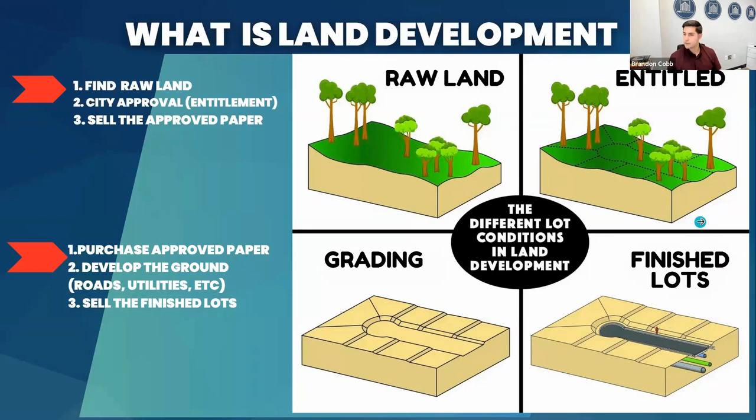So there's two options: one, sell the paper, and two, actually sell finished lots to national home builders. There's pros and cons to both, and this is a lot faster of a process, right? So construction drawings are finished, and then you sell that to a national home builder or a developer that wants to develop. And then this is a lot longer of a process because you have to actually do the development, right? And the process definitely depends on what state and county and municipality you're in. It can be shorter or longer. If you're in California, I'm sorry, it's a long process, or New York, New Jersey, etc.

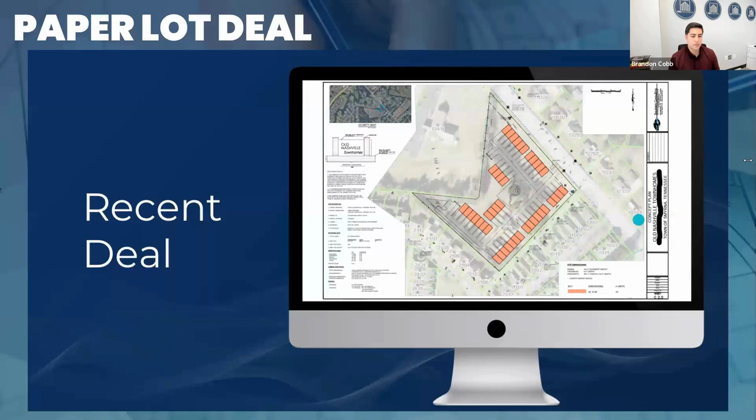So we talked about a paper lot deal. It was one of the first entitlement process paper lot deals. This is one that we just did in Smyrna, Tennessee. And there you go, we made $446,000. It was a pretty easy deal. It would have been easier if the person that brought it to us actually followed through.

There were some missteps, but I think it was a really good learning lesson for that person. It probably would have taken 6 months, but it took 12 months. And you know, it probably took about 20 hours of work, honestly. So it's a pretty good return on investment there.

And then this is another project where we took that paper, but we actually got it funded and put in the actual lots. As you can tell, this is a townhome development. There were 36 homes there. There's about 34 single family lots here. This is actually called Sadoff Cobb Way in White Bluff, Tennessee.

And this is called Lala Loop. So Sadoff is my last name, Cobb is Brandon's last name, and Lala is my mom's name. So that's something cool that you can do when you develop properties. Even if you're entitled in paper, you can name it and honor people that mean something to you, and just leave a legacy behind. That's one of my favorite things to do.

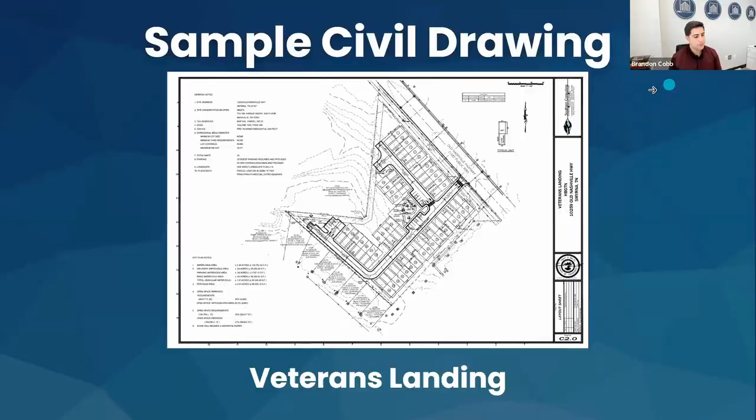So how do we start? Right now you have a piece of property, you got it under contract, and you're like, where do I start? You start by really talking to the staff, the stakeholders. You want to be able to talk to the planning commission, the city council, the planning staff. What do they want in the area? Let's say they want single family homes. So you have to make sure that you design a concept plan.

A concept plan is literally just a basic drawing of what it is that you're going to actually put, right? It's not exact, but it's trying to dial in the correct lot dimensions, widths, etc. to put those onto paper so you can understand the density that you're going to be able to get. Okay. So this is an actual concept plan.

So we would take this concept plan that will be done by a civil engineer, and we'll put all of the roads, etc. that is in accordance with that local municipality. Specifically in this municipality, they have what's called the Hartman overlay, right? If this was regular, let's just say another Dickson County, I probably could fit maybe 70 homes on there, but their requirement is a rear load townhome, right? So now you have alleys that you have to put in as well. There's a specific front setback requirement.

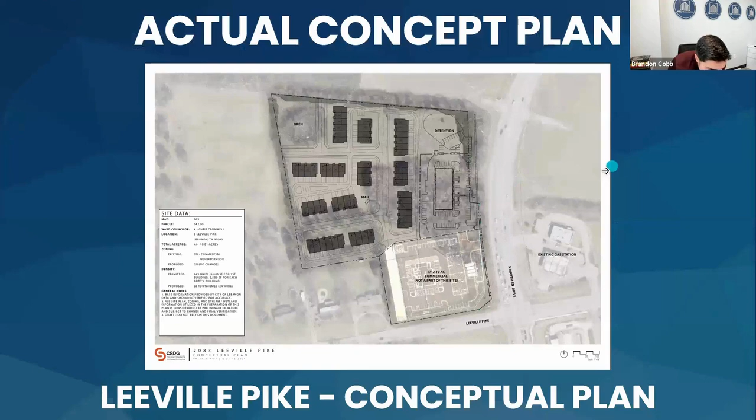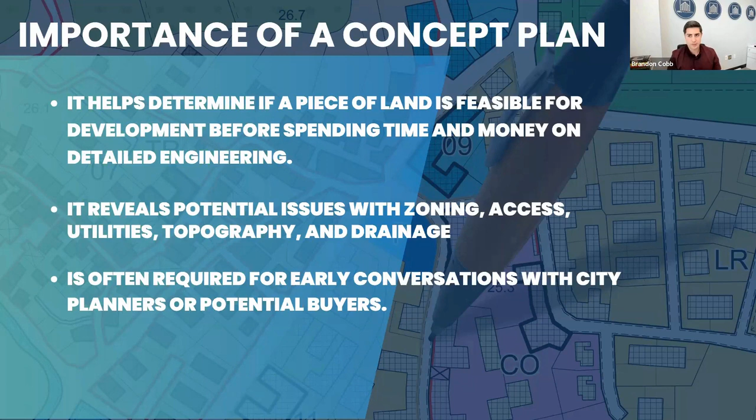And you'd also be taking into account, so this is rather flat, I don't know if you could see this, but these are the lines there. So the state has what's called LIDAR, which is the contours of the earth, right? And how it actually lays, to make sure that you're not putting a box onto a side of a cliff, because you probably couldn't do that. So it takes that into account as well. On this site, we knew that it was pretty flat, so the contours were not really that important.

So what do we do? How do we hire an engineer to do this? For our firm, we focus on hiring a civil engineer that is recommended by the municipality that I'm trying to submit to. So whoever they like working with, that's probably going to be the civil engineer that I'm going to hire. So when I talk to them, I ask them who they recommend. They'll give me a couple firms, and I'll reach out to those firms and I'll ask for a concept plan.

The reason I do that is because they have a working relationship with that municipality, and that planning staff and engineering staff knows best who is a good engineer and who is bad and who they have a good working relationship with. Okay. Again, a good civil engineering firm is going to have a good land planner, and that is somebody that knows exactly how to lay out a site. They want to have an actual civil engineer that can sign off on the actual construction drawings that we're going to go into if this concept is approved and the preliminary plat is approved.

And the reason for that is because they got that civil engineer in there to see if their land planning, that concept plan, is actually going to be able to get built in reality, right? So it's a good check and balance to see if that land planner is in line.

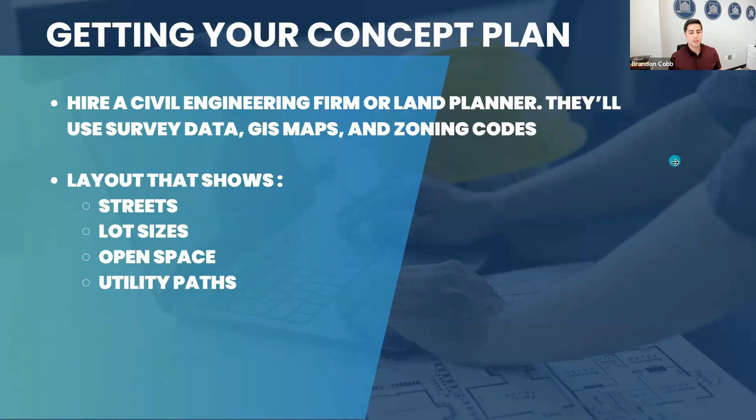So what we've got to do. When we're creating the concept plan, we want to make sure: what is the zoning? What can we put on here? Sometimes folks are like, oh, I'm going to put an apartment here, or I'm going to put townhomes here. There may be a moratorium on townhomes, or maybe a moratorium on apartments.

Even if the zoning says potentially that you can do this, there also may be an unwritten moratorium where, yeah, you can put townhomes here, but no one on the planning commission is going to vote for townhomes because they don't want townhomes anymore. They have enough. They want single family homes.

So a good civil engineering firm is going to be able to tell you those unspoken things that the planning commission and/or the city council and the planning department has. Okay.

Brandon, any questions? Anybody got any questions so far? No, you're good, man. There's a couple questions in the chat, but we'll save them to the very end.

Cool. All right. So how do you know if you need to rezone? You've got this concept plan, let's just say it's a commercial lot, it's got road frontage, and you want to check what the current zoning is. The current zoning is going to be on the GIS map. You can call the planning staff and ask them what their current zoning is. Like I said, it may say that it'll support townhomes or single family.

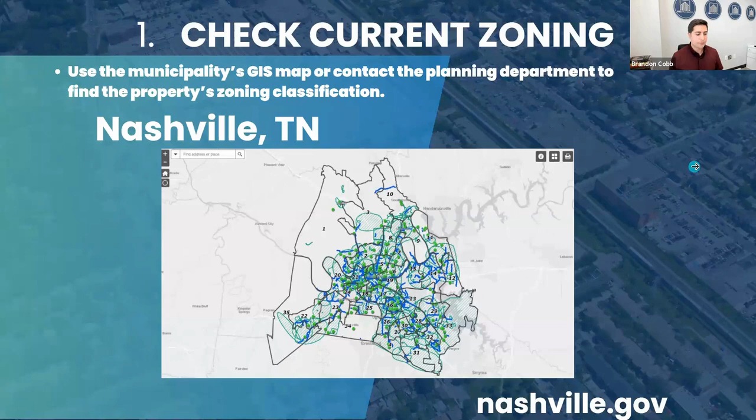So if we're in Nashville, we'll go to nashville.gov. There's the parcel viewer. We'll go into a site and try to figure out what the zoning classification for my site is. So I'll go to the parcel viewer. It'll tell me, let's say, R6. It'll say this is zoned R6.

I will then take that R6, go to the zoning classifications, and I didn't pull that up here, but you can go to the zoning ordinance, figure out what the R6 is, and it'll say 6,000 square foot lots. And let's say you have 60,000 square feet of lot, and you can be like, oh man, I now could put 10 homes here, possibly, right? So now this is where you start your math.

And what you do is you'll go ahead and compare your site and what it is that you want to do. Let's say you want to put townhomes. Are there townhomes or single family homes in and around here? If the zoning allows, you can go ahead and put that in there.

And sometimes you have a commercial site and you're like, oh, I want to put townhomes here. If there's no residential future plan for this area in the city's future plan, or when you talk to the city, they may not let you spot rezone that area, but they may. So again, take that municipality, the agency review, and the planning staff will tell you what they want and don't want. Take that, and based on their guidance, you'll create your concept plan.

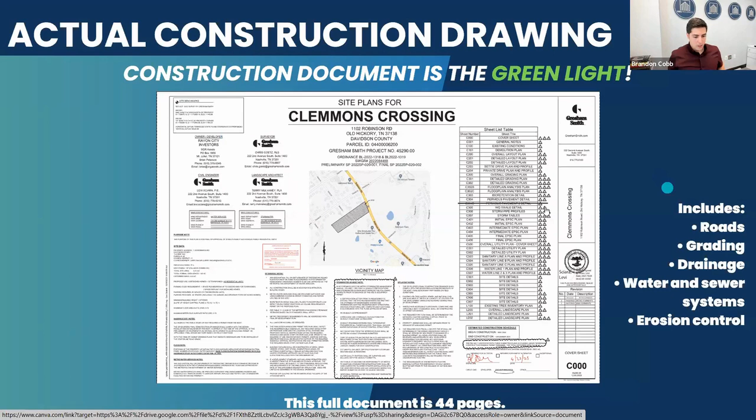So here we go. Get this. Hold on, see this. All right, can everybody see my screen? Yeah. Can you see the screen? Okay, great.

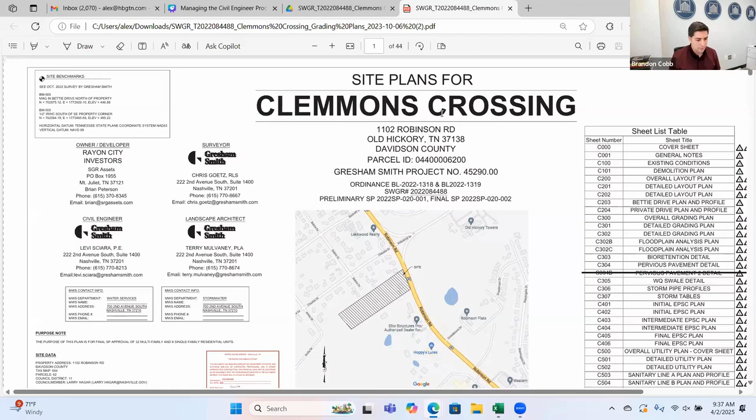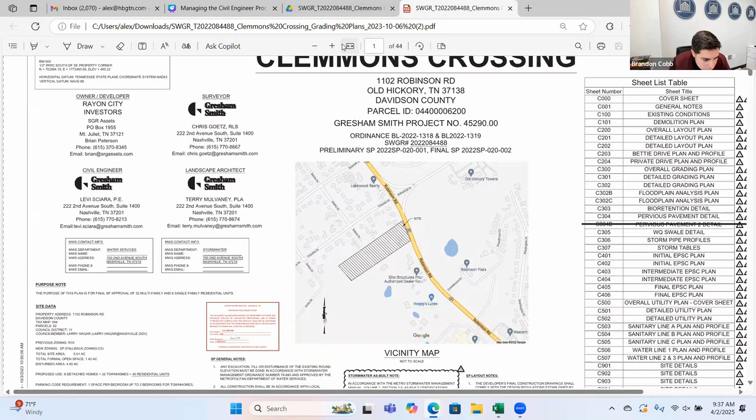All right. So this is a subdivision that we are doing. The first page of a civil engineering plan has your title block, right? What is this called? So Clemmons Crossing is the subdivision. The address and the parcel of the actual property. Based on the municipality, it'll have the engineer here in the center, and it'll have the actual engineer who's designing it. One second, let me go here. To the right as well. Sometimes it's at the top, sometimes it's the bottom, but it's typically here in the margins.

In Nashville, it'll also have your stormwater permit number and your preliminary SP approval. See that?

So, and your final SP approval. So this thing is an approved preliminary, approved final, and now stormwater approved the grading on this thing as well. Okay. On this, up top you have what's called a benchmark. Sometimes there's one, sometimes there's two.

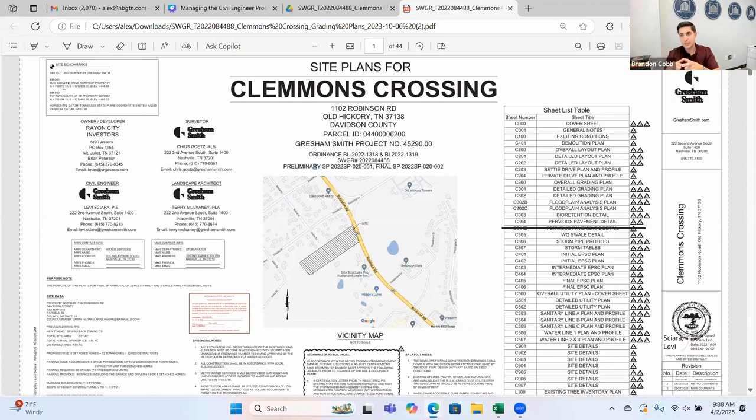And a benchmark is a confirmed point of reference that is verified by GPS that says this is our 10-digit grid, right? And it says that this is this point. Sometimes it's, let's say, a top of a fire hydrant, right? And it's going to say the top of this is at 446.88 elevation above sea, and at this coordinate, north and south. So you have a GPS coordinate for it.

The reason it's important when we're doing civil engineering plans, everything here talks about elevation and benchmark, and all that is, if you could just imagine your latitude, longitude, right? Your left to right, and the elevation is the depth at which you're going to be able to design your road, your sewer, etc.

These benchmarks that are set onto a site have a little GPS puck that we put on there, and it talks to all of the little tractors and all of the equipment to ensure that we're digging as deep as per the civil engineer's design plans, and we are at that depth. It's just a confirmation to make sure that we are calibrated on this site. It's our calibration point to the site. AKA benchmarks. Very important.

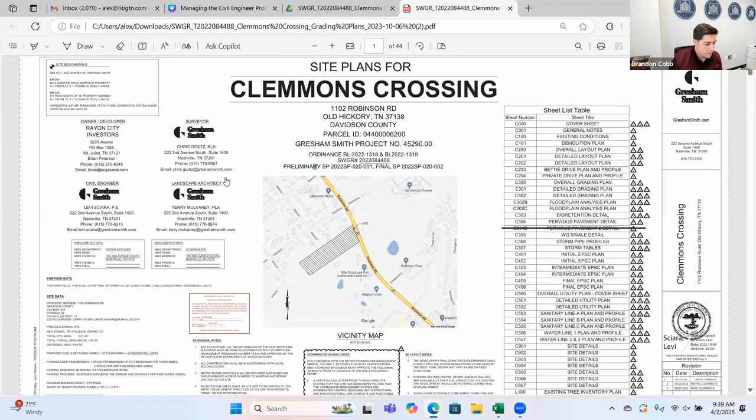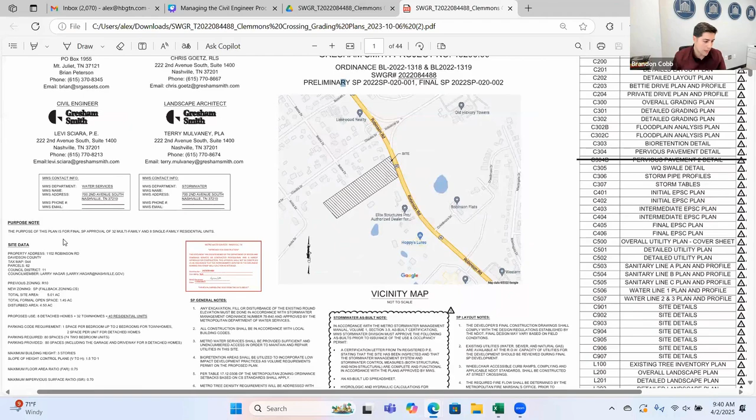All right. So it talks about the developer. It'll give you who owns the property. And then you have what's called general notes and specific site data and special notes. That is all here. It talks about what kind of property this is. In every single municipality, the cover sheet sometimes is super detailed, and sometimes it doesn't have much. It's just based on the municipality. In Nashville, it's very specific because every single reviewing body wants their specific notes. So the SP department, which is like the planning staff, wants you to have all these notes on here.

It talks about the landscaping needs to be irrigated. Just this one point, why is that important? Because let's say you have 36 homes and 36 water meters. Well, it says everything needs to be irrigated. That means if you have any grass outside of the actual lot, which you would, because you have some common space, it needs to be irrigated, which means you now have a secondary water meter that you need to account for in your construction budget, because now it's another tap and it's now a bill to the HOA.

So you want to make sure that you read and understand all of the notes and all the requirements on your special notes and specified notes of every single sheet. Okay. Your stormwater, for instance, and I won't bore you to death because it'll be a lot to cover, but you have to do what's called an as-built drawing. So when we create our stormwater structures, the little drain that rain goes into, we have the civil engineer plan, the blueprints that say, go ahead and put this in. Then what we have to do is do an as-built.

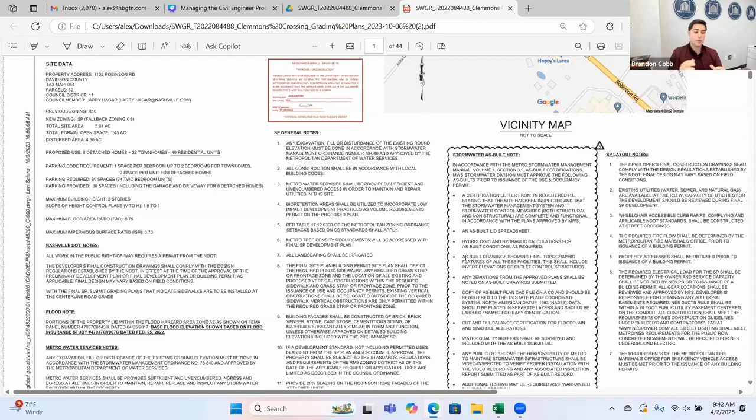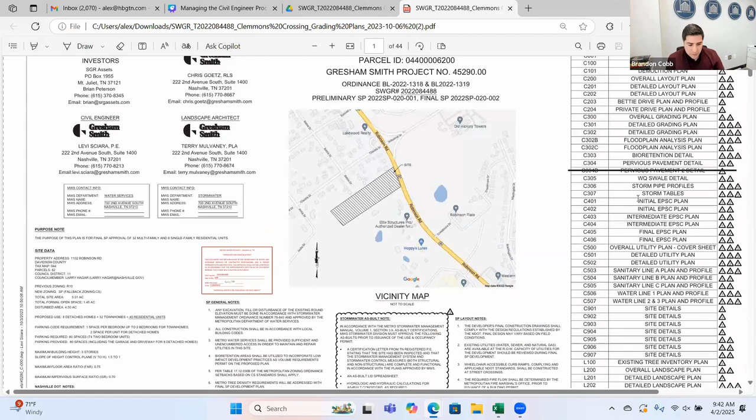So you'll do an as-built, and the stormwater department wants you to present that to them for them to give you an approval. So a whole bunch of notes, very important. Typically you have a signature here telling you that your stuff is approved and some signatures at the bottom. This is what's called your sheet list table. It will have all of the sheet numbers and all the plans per sheet. In Nashville, you have all these other notes, your erosion prevention, your grading and drainage notes, etc.

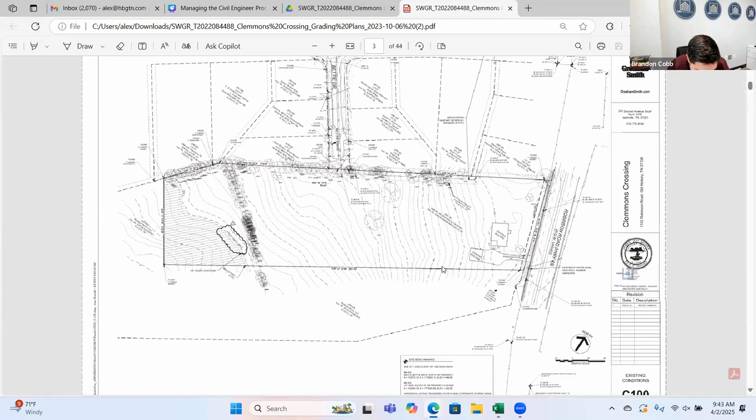Okay, demolition. So in here, this is what's called your existing conditions. When this thing got surveyed, this is the existing conditions. You have a house here, you've got some bushes. This is the current topography. So that's what this sheet calls for. Then you have what's called your demolition. What are we actually going to do to this site?

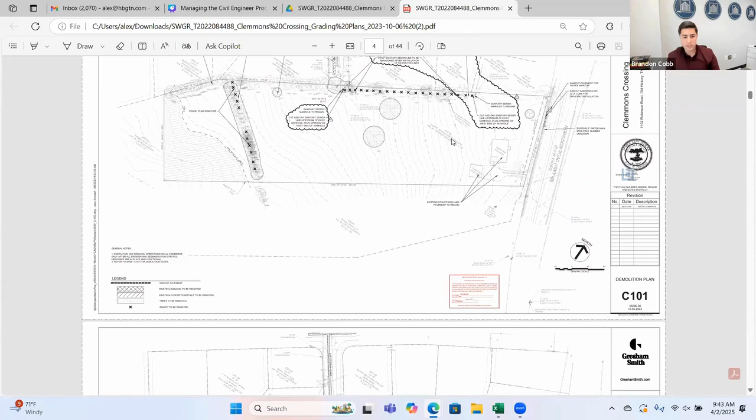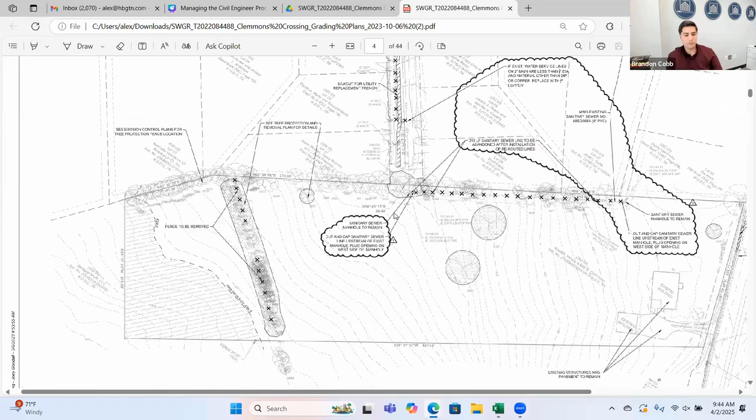On this site specifically, there's a house, and we're going to actually keep that house. We're not going to demo it. Everywhere else, this says cut and cap sanitary sewer upstream of existing manhole, plug the opening on the west side of the manhole. So it's telling us exactly what we have to actually do. And then here we're going to have to protect the tree from silt, so we'll put little noodles around it. So it tells us exactly what to do for our demolition or clearing of the site.

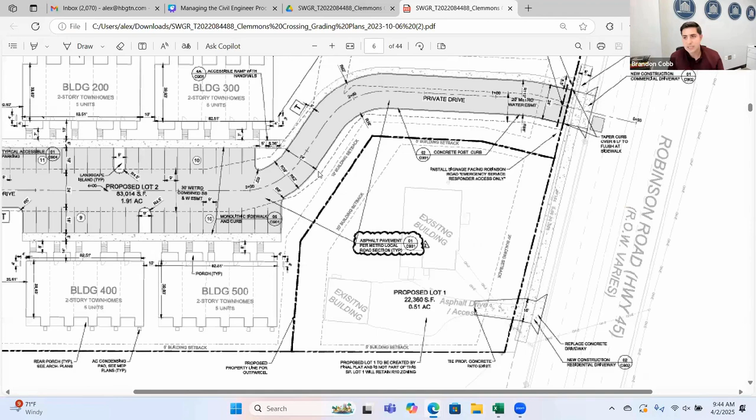Okay. The next one is going to be your overall layout. So this is just overall, this is what the site's going to look like. And then you're going to get into your detailed layout plan, and your detailed layout plan is going to actually start talking about distances and the radiuses that are going to be on the drawing. Okay.

Also, one of the things I wanted to mention is, over here to the right, you always have a revision. So let's say we got on site and we need the engineer to revise it. This is very important because it has a revision date of like Metro Water, stormwater. They wanted a specific thing. We're confirming that this sheet now is in line with that comment of MWS. So we're on the right revision of our plan. Okay.

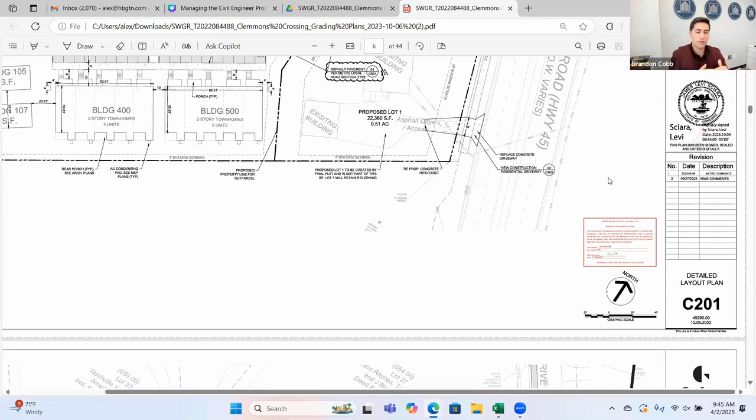So this is the detailed layout plan. And as you can tell here, there was a couple, right? So your detailed layout plan is going to be sometimes 2, 3, 4 pages. So let's just talk about it. Okay.

So here you talk about, okay, how do I get my costs, my takeoffs, right? How much is this going to cost me? So there are companies that'll do what's called a takeoff. They'll figure out all the materials. Your civil engineer will give you an estimate of construction, and a civil contractor will look at all these plans. And the more details there are, the more apples to apples you're going to get of an actual bid. So it's very important that you have very good detailed plans.

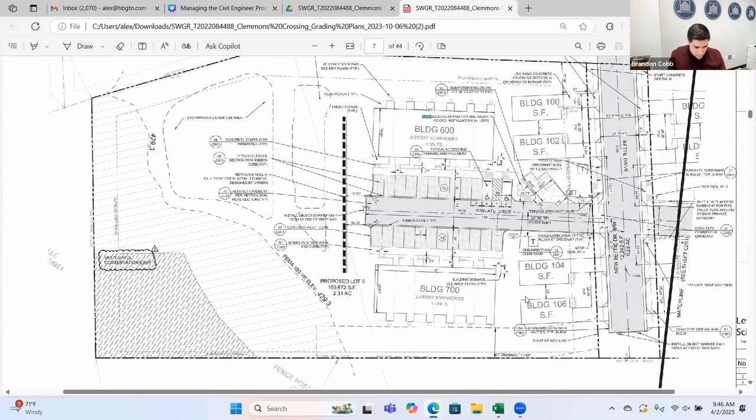For instance, this says a 5-foot by 3.5-foot concrete pad for a mail kiosk, right? So now you have to think, okay, I have to get a mail kiosk. Not only does it have to have a concrete pad, but now I have to buy the actual kiosk. So this is going to allow you to really figure out how much this whole thing is going to cost you. And then we'll talk here in a second about some value engineering of what you can do. All right, here we go.

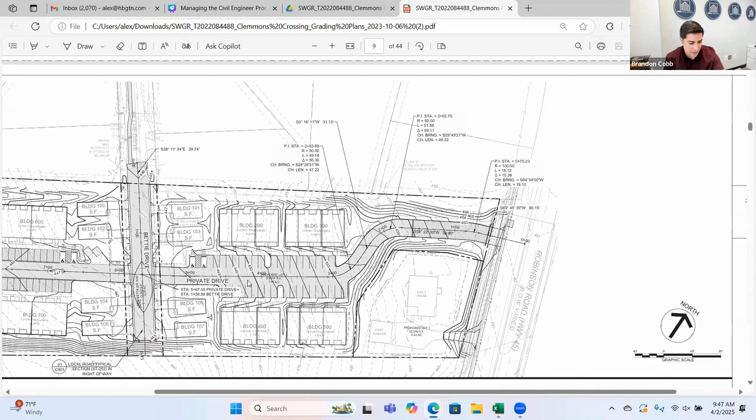So now you're talking about your grading plan. Your lines that are lightly dashed are your current and existing grading, and the ones that are solid are what elevation we're actually going to grade to. So here, for instance, in this line, we are at 465 elevation, but this little dot here says 465, and here's 459. So that is 6 feet of cut. That means we have to cut out in that section 6 feet to make sure we are in line with what the civil engineer is saying. So that's what all these marks are. The civil engineer is telling us how they want us to grade this site.

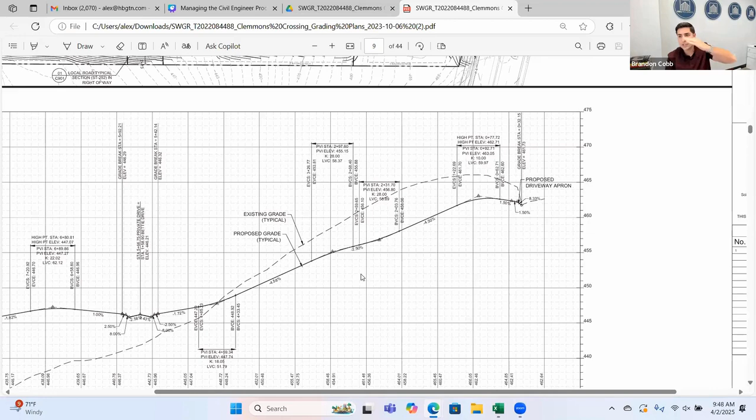Okay. And then this is what's called the cross section, and it's telling us that this is our current existing grade, but this is our proposed grade. So in this instance here, we are cutting, but in this instance here, we're actually filling. I don't know if you can see that, right? And it'll tell you at what degree, what elevation and at what slope you're actually cutting and or filling your site.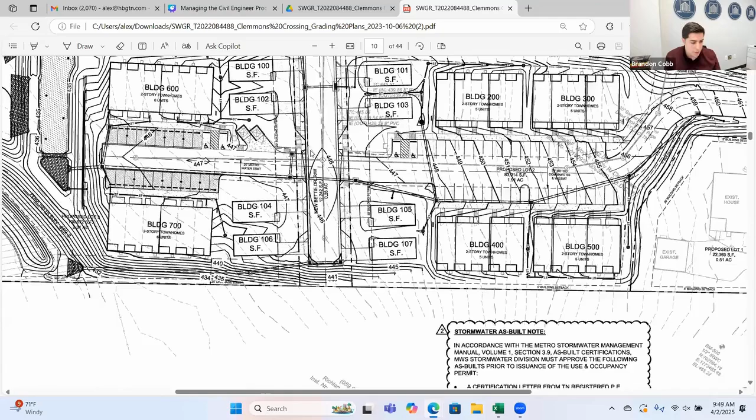I will fast forward to... Those are like the ditches that the water drains into on the side of the curbs? Correct. All right. So here we are, we're at the grading plan. This is what I wanted to kind of talk to you about.

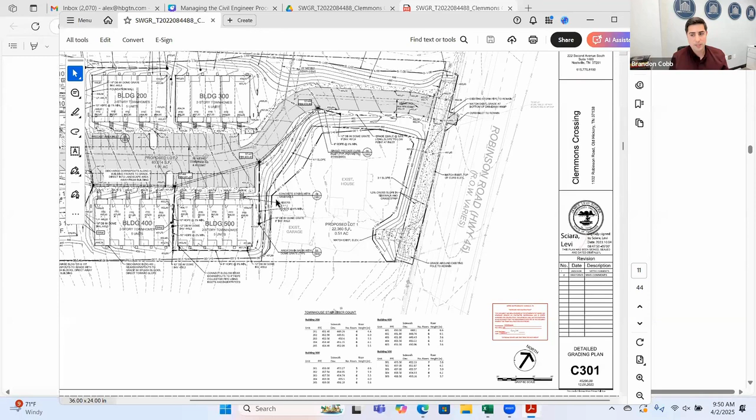So this is where, on this specific site, because it's an SP, you're telling the city exactly what kind of homes you're going to build. And in Nashville, they want to know the elevation of what's called the finished floor elevation, FFE, of every single unit. Okay. So when you go here, it says your elevation is 455.5. That means 455.5 feet above sea level. And then this is 457 feet. That means when I grade, that second home is going to be 2 feet higher than the first one. So it's going to be kind of stair stepping up.

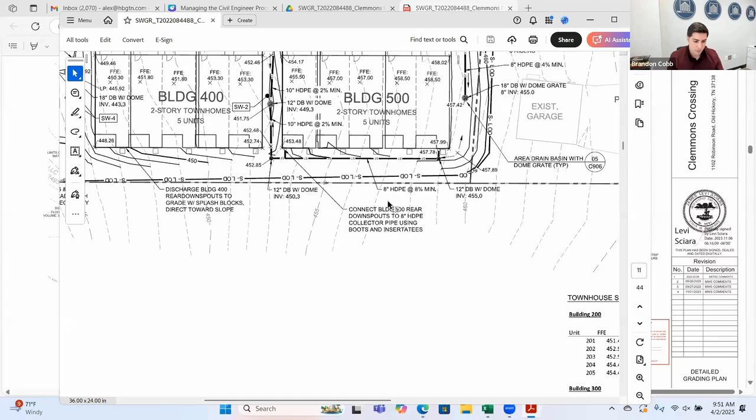This is important to quite a few people. One, it's important to your grader because it needs to grade accordingly. Second, it's important to your foundation people. Thirdly, it's important to your framing people because this structure is going to be one structure and they need to make sure that they follow this, right? So if you're actually constructing this, you need to make sure that's done properly. And then it also tells you all your discharge points for all of your stormwater.

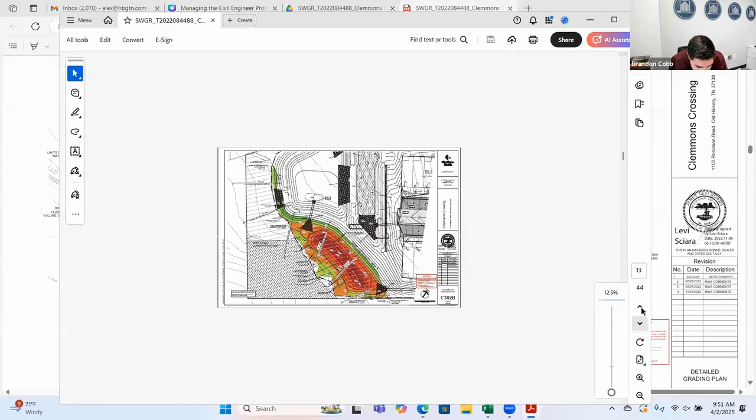So then let's see. So this is your floodplain analysis. This says that this is in a floodplain. What do you need to stay out of? The places you need to stay out of, etc. This is pretty extensive. Hold on.

All right. So here you have your cut and fill. Your person that's going to be grading your site is going to go off of these volumes on how much stuff they're going to cut. It means how much dirt they're going to take away and how much dirt they're going to have to put in and how they're going to balance the site. It's very important because that's how much they're charging you, because typically they charge you per yard of material moved or brought in.

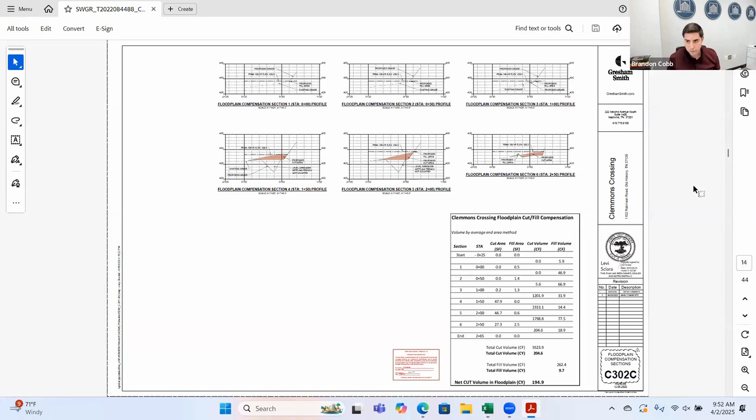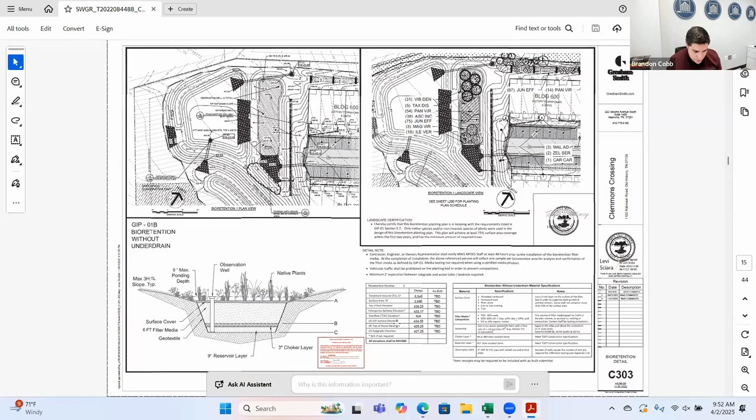What I want to show you is also, in some of the sheets, you'll have details. And at the end of the sheets, which we'll go over briefly, you'll actually have exactly the cross section of how the city wants you to build this pond. There are many ways to build it. This is theirs, and they want to make sure that you build it in accordance with their specifications. So they'll have the cross sections and details. So these are all details of every single stormwater structure, etc.

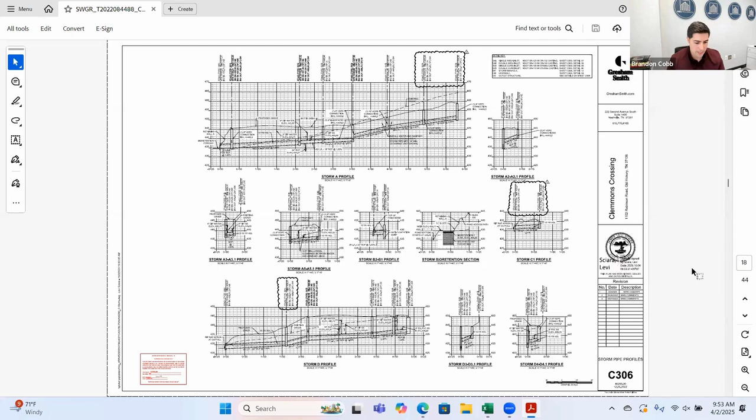Then we're going to the actual structures. So it talks about every structure that you make. Those concrete structures that are in the ground are actually made for each project. The reason for that is because you have your inverts, right? The pipe that comes into the structure and the pipe that comes out of the structure to keep water flowing. That little thing is made specifically for the site. That's what this detail is, because it wants to show your storm structure Charlie 1 is this size and this depth and this width.

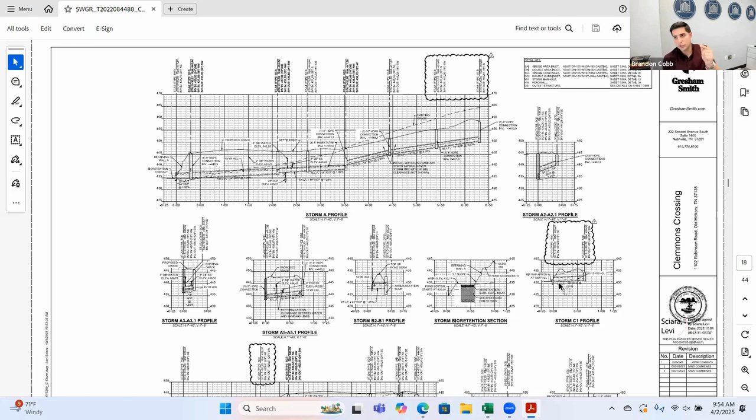So then we send that over, when we send the CDs, to a company that makes structures, and they price that out specifically for this project. And it'll come onto the project when we order it, kind of like a Lego piece: Charlie 1, Charlie 2, Charlie 3, in accordance with your plan. And so here we are. This is a great example. You'll have all your structures, and you'll have exactly the inverts that we're talking about, pipe in and pipe out, and at what elevation, to make sure that those holes are made in those structures correctly.

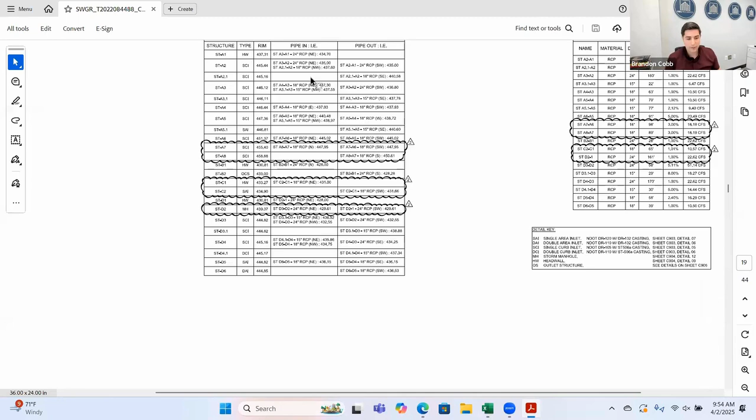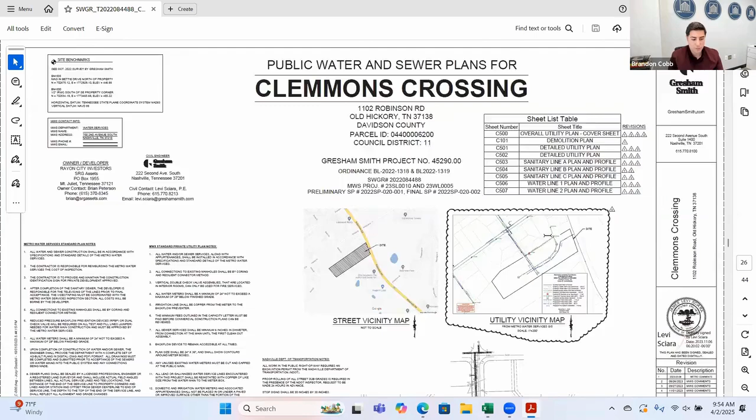And then you'll go through it. This is your stormwater, and then where they're supposed to be laid out, etc. In the same way, you'll have your public water and sewer, because we need to know not only the size of your water and sewer line, and we're running a little bit out of time, but you also want to know the depth of that sewer manhole.

So here we have, to our left, 445 feet, and the bottom of this thing is about 439. So this manhole that's in the ground at that specific elevation and latitude, longitude, is about 6 feet deep. But what's more important is that the invert for that manhole says that it's 439.58.

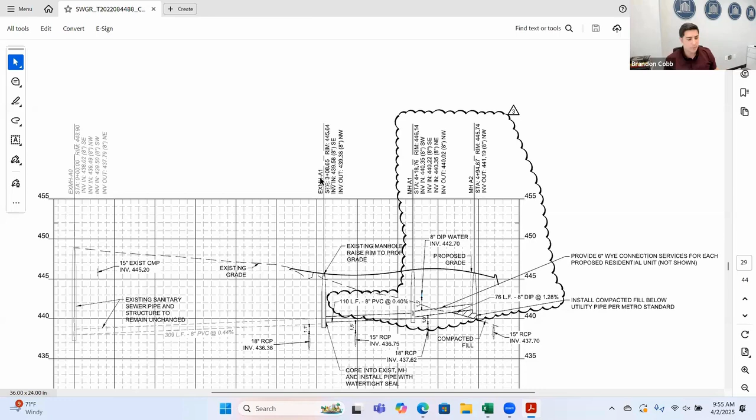It's an 8-inch hole, and it's facing southeast at this specific station, which means this specific azimuth, right? And all that is what angle is that pipe in that actual concrete structure. Okay. So all of this is important because you want to make sure that you're looking for us.

And before I finish, one of the things that you do when you're doing the development is you're doing geotechnical, right? Geotechnical is the investigation of the subsurface, right? How much rock, etc., is on this plan. So while we're going through the planning process and getting approved, we're doing a geotechnical survey. The reason we do that is because we want to know where the rock is. So then the way that we lay out this site may be a little different.

If we have a whole bunch of rock on one side, and we don't have any rock on this side, it may be beneficial for us to do maybe one less unit, or maybe it'll be beneficial for us to shift some units to get the sewer out of the rock.

Another thing that we do at our firm is we try to ask the local municipality. Some of them are favorable to this and some are not. So we say, hey, can we put the sewer in the front setback? So here, as you can tell, you have your sewer in the middle of the road. Well, sometimes we'll ask them, can we put it here in the grass? The reason that's important is because when I have to backfill, remember that sewer was 6 feet deep.

When I have to backfill, I've got to backfill it with rock because there's going to be cars driving on it. When I backfill it on grass, I only have to have 6 inches of cover, so 6 inches of gravel on top of that pipe, and then fill it back up with the dirt. Well, guess what? Now that means I have less dirt that I have to take off site, because when I dig this hole, I can put the dirt back in, and I have less rock and material that I have to bring onto site, and rock is very expensive. So it's just a cost saving measure.

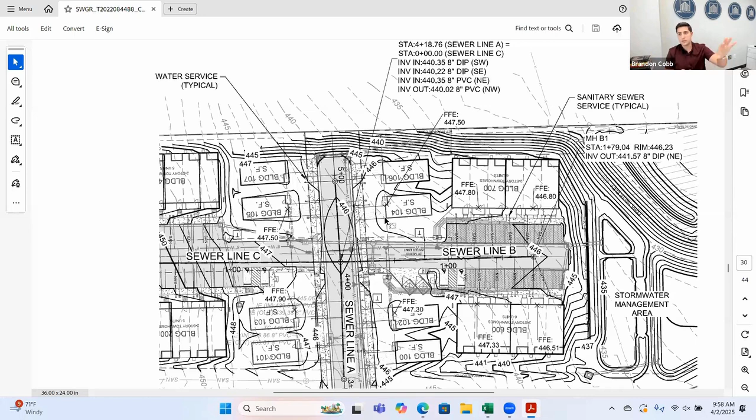So we have a 3-to-1 slope rather than putting a retaining wall, because a retaining wall is very expensive. If I give this guy $5,000 to get a slope easement for a piece of property that he doesn't even care about because it's the edge of their property, it may be a win-win.

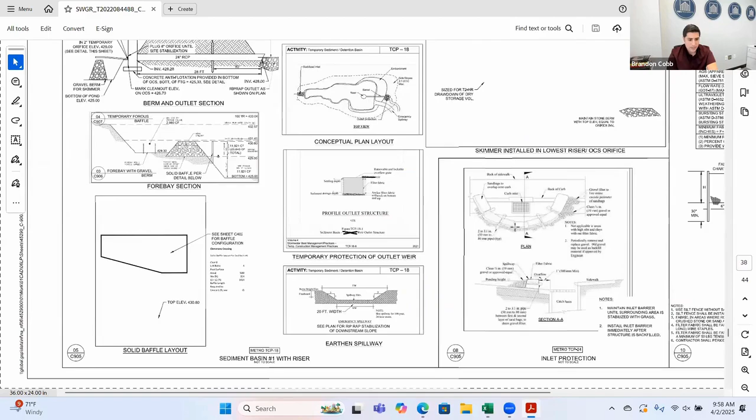Another thing here, we're almost out of time, I want to go to your details. So these are all the details on a site, okay? And that's typically at the bottom of your plans. This tells your contractor exactly what kind of materials, what design, etc., needs to be built on here, and your trees, your landscaping, etc.

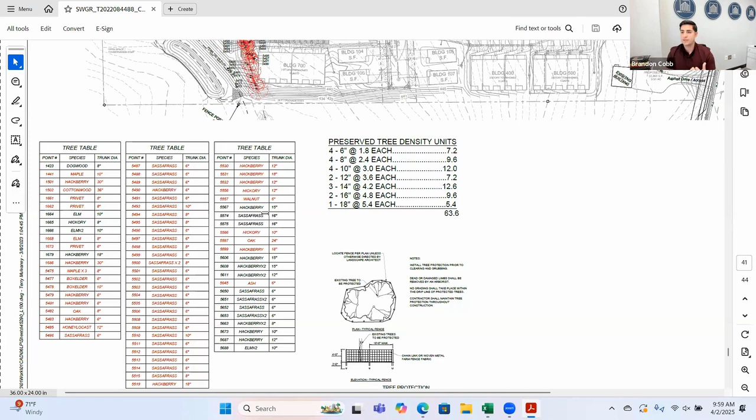Well, one of the other things that we try to do is we'll put in a cheaper curb, which is called an extruded curb. It's a 6-inch curb. Some engineers like what's called a curb and gutter, but per linear foot, a curb and gutter is about $39 in this market. An extruded curb is about $6.50 to $9 here in Nashville. It may change based on wherever you are, but that's what we've got to pay here. So we try to put the cheaper curb.

Additionally, there's this plant schedule where the city's saying these are the plants that I want you to have. If you were to design the site, you take this plant schedule, and rather than giving it to a local nursery, you go to an actual wholesale nursery, you set up an account, and a tree that costs you $600, you can sometimes get for $70, $80. They'll deliver to site and your civil contractor will just install them.

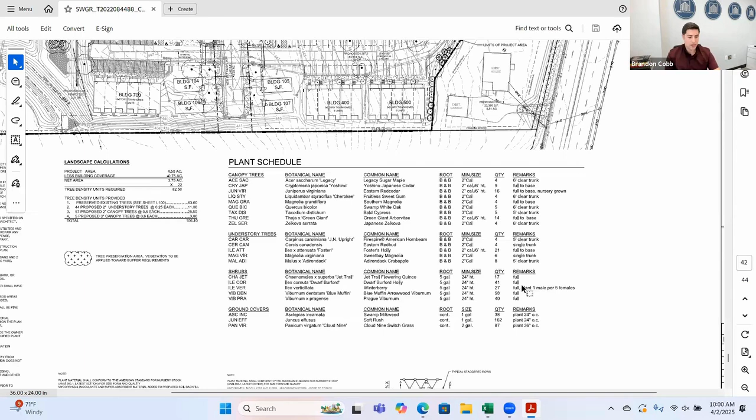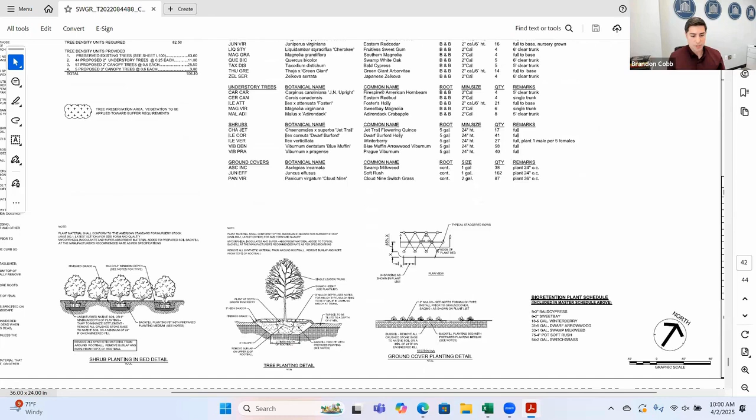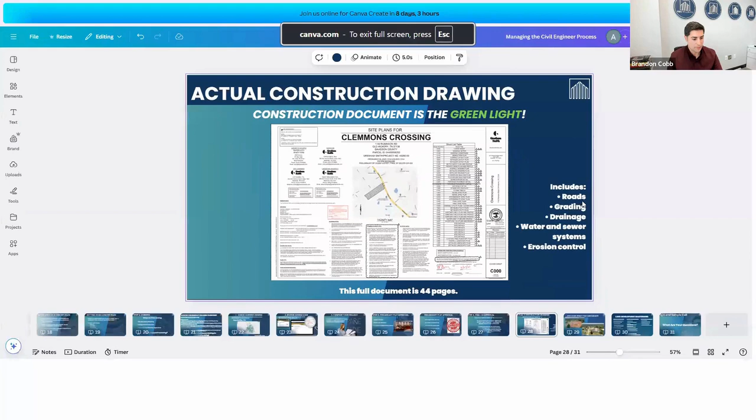I just wanted to cover as much of this as possible. It's really tough to cover all of it. But depending on your questions, that's kind of what I've got here. So if you understand how to do that, then I believe you can do this. So just like that, you could go ahead and develop communities and make them like so. Depending on your questions, that's kind of what I got. Brandon, you want to take this?

Yeah. And just to kind of recap what you just said, I don't know the ins and outs of the civil drawings plans. Obviously, it definitely helps to know that. But is that a requirement? Do you need to understand how to read everything to do this kind of stuff? Or if you hire a good civil engineer, are they going to be able to manage most of it? I think if you hire a civil engineer, it's good, but I'll be honest with you.

I think you definitely want to know how to read this, and you want to have somebody to kind of hold your hand, who has had experience, because you may have a good civil engineer, right? And it's creating the best product, but sometimes the best product is not needed in that market. You got to make sure: are extruded curbs great? They work, right? Are curb and gutter great? Yeah, they look great, but they cost a lot more money. So if you didn't know how to ask that question of your civil engineer, well, there you go. You just spent another $100,000 on your subdivision.

Do you want to just give away $100,000? So, you don't have to know these things, but you will be leaving a significant amount, millions of dollars, on the table if you don't. That's just the way it is. Yeah. Are there third party people you can hire to audit your plans and look at them if you don't want to do that?